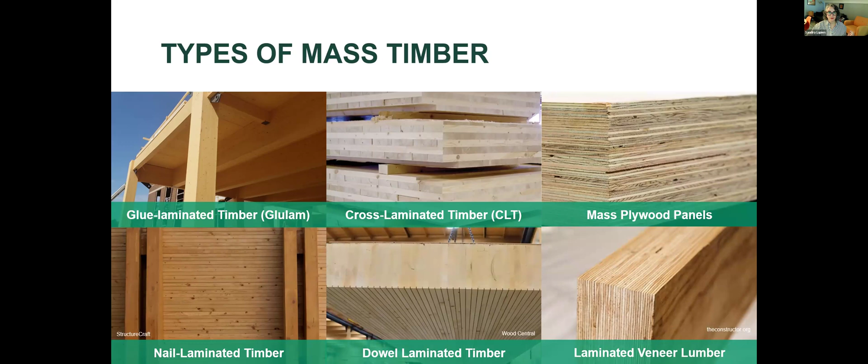A few things that Mass Timber at MSU is doing to foster a Mass Timber ecosystem in Michigan - first, I think George is going to talk more about this - we really leverage our STEM facility as a learning laboratory to create knowledge and community across the state.

We host a quarterly virtual MassTimber community of practice. It's an online space where people can come together to learn about MassTimber and to exchange information about MassTimber with others who are engaged or seeking to engage with MassTimber in Michigan.

This next meeting is actually next week, March 19th, and we're going to be talking about the MassTimber elements of the new 2021 Michigan Building Code. So if you're interested in that, follow up with me and we can get you some information.

We bring people together, we host events, we take people to events. We want to make sure that people have access to information and access to each other to build networks and partnerships. For example, later this month, we've organized a delegation of Michigan folks to attend the International MassTimber Conference in Portland, Oregon. Again, if you're interested, let me know.

And then research and teaching. We have a diverse research portfolio related to MassTimber across forestry, forest economics, chemical engineering, construction management, structural engineering, all different types of research, and then also work developing curriculum to educate students and professionals about how to build with MassTimber, how to design MassTimber, really working to increase the knowledge base to advance this new way of building.

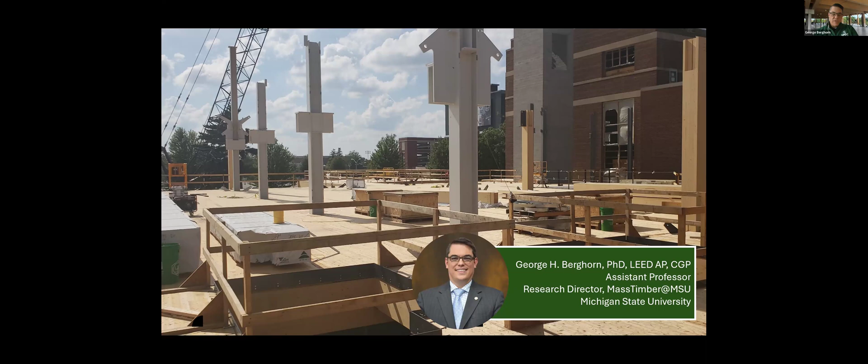So what I'm going to share with you this morning is just a little bit of the history of how the STEM building came to be at MSU, and then how we were able to effectively make the case for a first of its kind MassTimber structure on campus within the state back at the time that the planning process was being conducted, and now how the building continues to build that case for MassTimber construction statewide, regionally, and nationally. So every good project needs an origin story, and this is ours.

So in the summer of 2016, there were a group of individuals from Michigan who convened in Madison, Wisconsin at the U.S. Forest Service Forest Products Lab. These were primarily academic folks from universities across the state of Michigan that decided to get together just to better understand what kind of research support and capabilities were available from the Forest Products Lab.

Through those meetings and discussions, one of the things that the group really settled on was that in order to propel MassTimber interest forward in Michigan and really move it out from just a niche interest type of thing into broader adoption, we agreed that some university within the state should really take on the mantle of trying to get a MassTimber building constructed on campus. And that was for a variety of strategic reasons.

Obviously, with public universities in the room, these buildings would then become publicly accessible to others in the community, both professionals and also people within the community who might just be interested in mass timber. But also importantly, at least for MSU, U of M, and I believe Wayne State University, we have written into law that the boards of trustees of those universities are in effect the AHJs for building projects on campus.

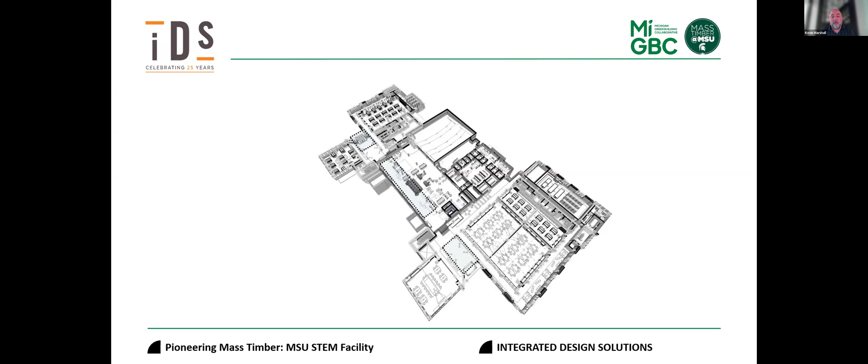The building is broken up into essentially three buildings, with the core being the Shaw Lane power plant, then the STEM wings, and then the classroom. The classroom addition is actually part of the power plant code-wise, but it's these three chunks that make up the building. The Shaw Lane power plant was a coal-fired power plant that was decommissioned in 1976 and sat waiting for its future use ever since.

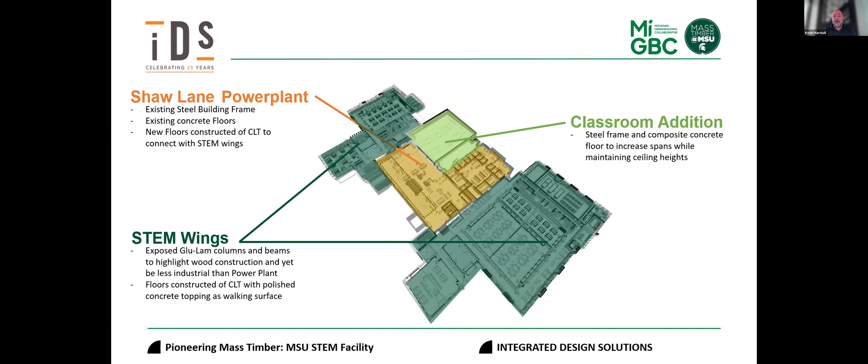When we added to the project, our site was chosen by the university in part to engage as a learning center with the power plant and create this whole facility, this complex of buildings. Later on, towards the end of the project, the classroom addition was added, such that we created a lecture hall and some large flat floor classroom on the upper floor that is serving a significant need on campus.

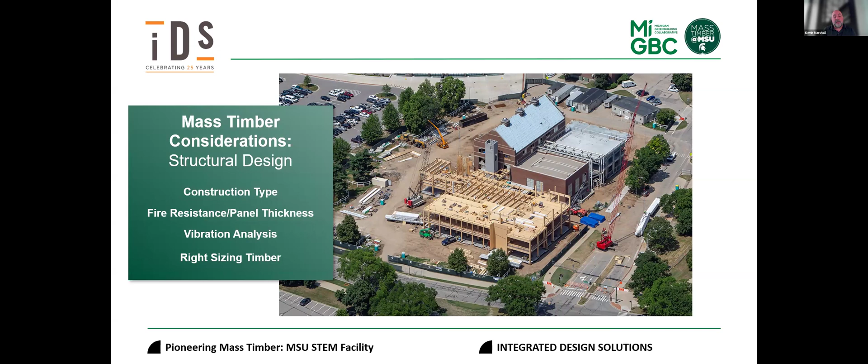So I'm going to talk a little bit about the lessons learned, and we'll start off with mass timber design considerations of structural design. There was construction type, fire resistance and panel thickness, vibration analysis, which George mentioned, and then right-sizing of the timber.

From a construction type standpoint, when we started this out, this was pre the 2021 IBC, and so types A, B, and C of a type 4 construction did not exist. So we were relegated as a business occupancy in a multi-story building to either being type 3A or B, or type heavy timber, or type 5B.

We worked with the State of Michigan, with the Bureau of Fire Services, and determined that the building best fit not a type 4 heavy timber, but actually type 3B, because of the need, from the laboratory's perspective, to have some concealed spaces within the building, which are generally not permitted in a heavy timber building.

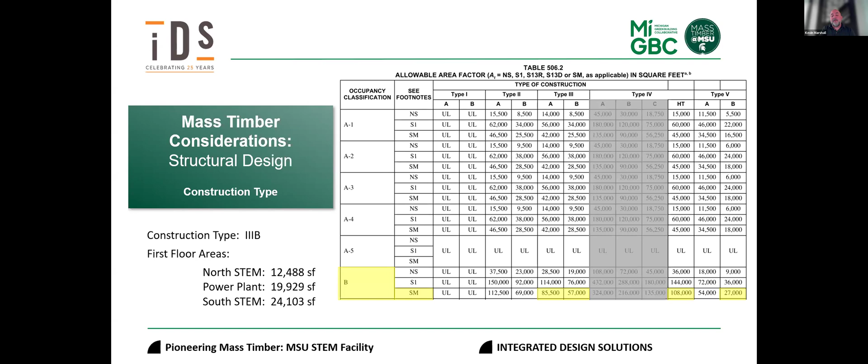Then we could have, as you can see on the lower left, the south STEM being the biggest chunk of the building at 24,000 square feet, could have technically fit within type 5B, but we wanted to leave some room, since we were going to build it at type 3 capacity anyway, to give the university some ability to either add on, renovate, or do things in the future with the project.

When we jump into fire resistance and panel thickness, the building has a Type 3B zero-hour fire rating for the structure, but there are still elements that need to carry fire rating, such as the stair shafts.

We used CLT panels to help stiffen the building and also carry some of the load of the stairs. Our structural load required 5 layers, a 5-lam CLT for the structural capacity. But when we calculated what we needed for the fire rating, it added 2 layers. So we ended up with, in the top center section, you can see the vertical joints, how they're handled from this panel with a 7-ply CLT wall system. The bottom shows a typical edge bearing on a CLT wall.

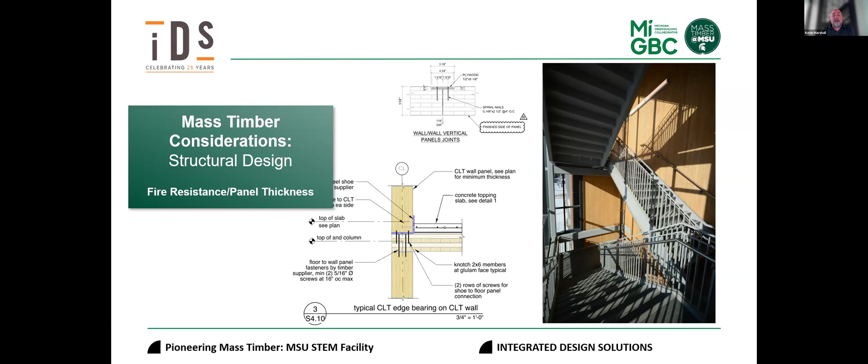This is how we first approached the project. But then we discovered that as part of the Michigan Building Code, you have to support the rated construction all the way down to grade, and to tie in our non-rated floor systems into the wall as shown on the screen would not have been possible. So we actually hung the CLT floor decks from the side of the panels, as opposed to embedding them in, as we see on this screen.

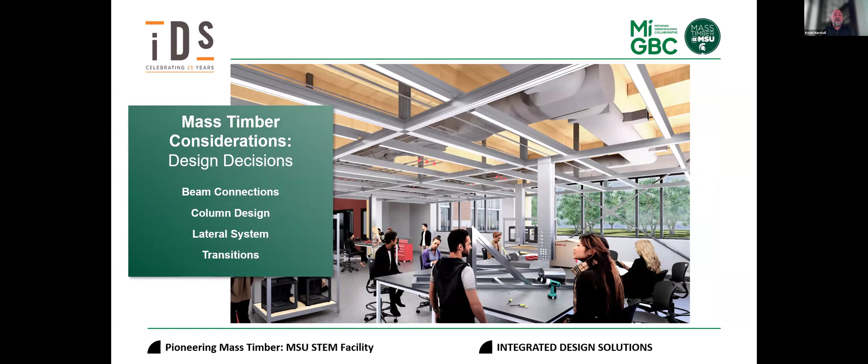Then we jump into design considerations. The first one we'll jump into is beam connections. There's a myriad of options. When you start the process of a mass timber building, there's a whole kit of parts that you can choose from in order to construct your building.

Part of that will be based on your construction type, and if you need to have protection of your connections for the primary structural frame system, in which case you would use the bottom center image, where you have to wrap them in gypsum board or some non-combustible surface.

The STEM project, because it was Type 3 and non-rated structure, we were able to expose the connection points, and that helped with tying in with the steel structure that was inside the power plant adjacent to it, to create some synergies between the two buildings. The other images just show some different methods for connecting, how different things can be assembled to make these connections.

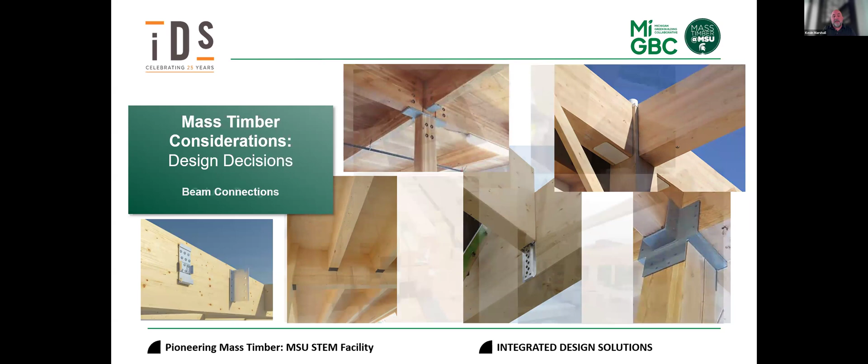Then there's the column design, where the columns started at grade, and the top left image shows a large base plate that extended down to the structural foundation, and then the floor was poured around it. You can see in that upper right picture there are 10 dowels that run through a knife plate, which you see in the top center picture, that tie the columns to these base plates.

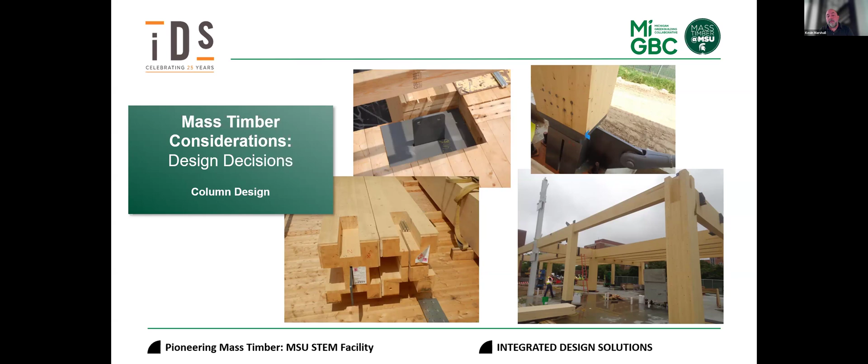One of the things we learned during the process is every manufacturer has kind of different ways they like to do connections, and it's one of the most important things we weren't able to go into fully, which was to select your mass timber provider early in the design process, so that you can right-size the timber structure to their typical modules and work with how they like to make connections.

All buildings have a lateral system that keeps the building rigid from wind and movement, and we had to make a decision on how we wanted that. We could have done timber, as you see in the University of Massachusetts Amherst building that we went and toured. They used glulam beams for their diagonal bracing.

The STEM project, we wanted to keep it lighter and a little thinner, and also bring more steel elements in to tie in with the power plant. So we used steel diagonal bars, as you see in the lower right, and then there are knife plates in the upper left that occur at all of these diagonal brace locations that tie the whole structure together.

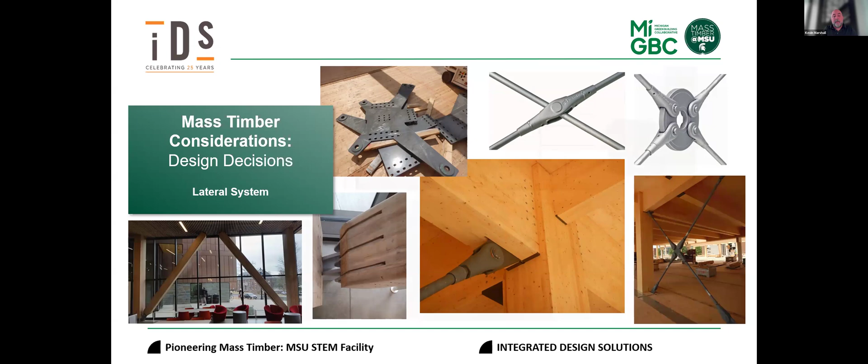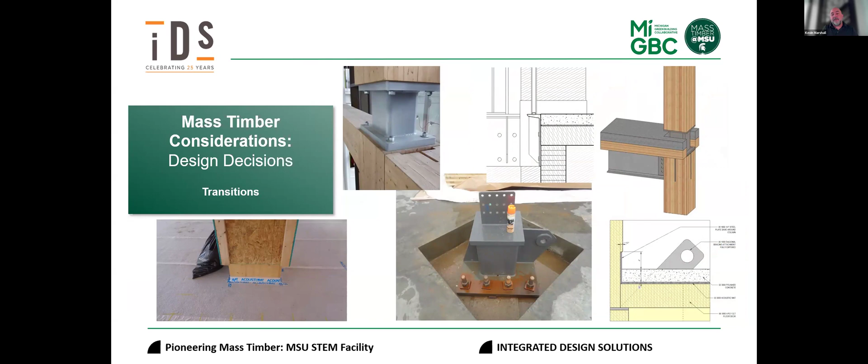Here are some more considerations on how the transitions happen, different options to consider for construction and making your transition as the columns stack as they work up the building.

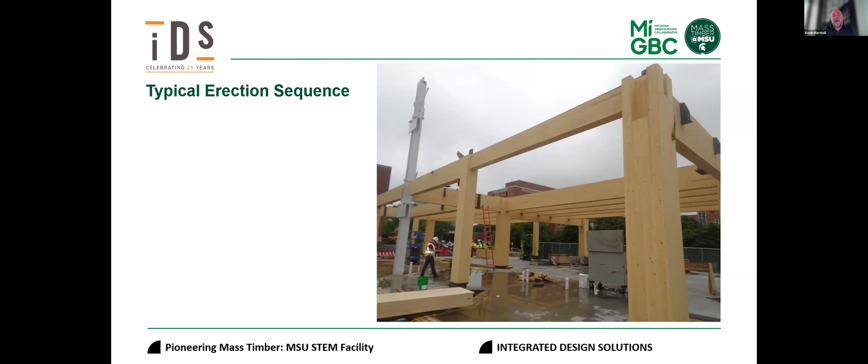You can see because of structural loading on the STEM project from the south, in the south penthouse, we inserted 4 steel columns within the wood frame, because otherwise the columns would have gotten so large if they had been timber that it would have affected program within the labs on the teaching floor. So we used, as George mentioned, a hybrid structure to create this.

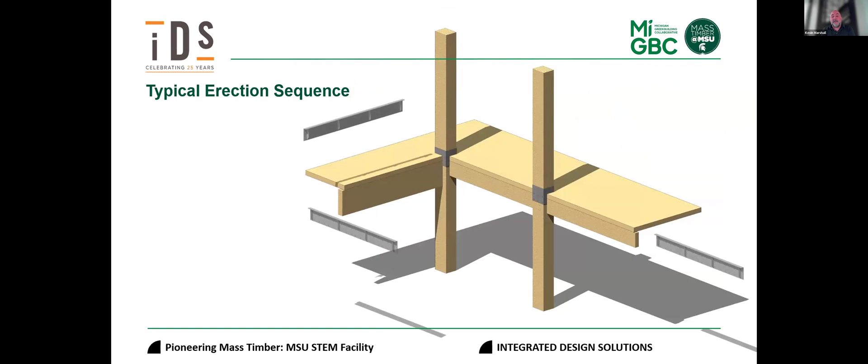Then we bring our CLT panels in, and then the next columns for the next floor. At this point, the floors are tied together and stable. Bill will talk as part of the schedule about the ability to work underneath that floor as it went up, which had some benefits. Then you finish it off with decorative pieces, the edges of slabs - in our case, a 3-inch concrete topping - and the railing system for our 3-story opening at North Stem and South Stem.

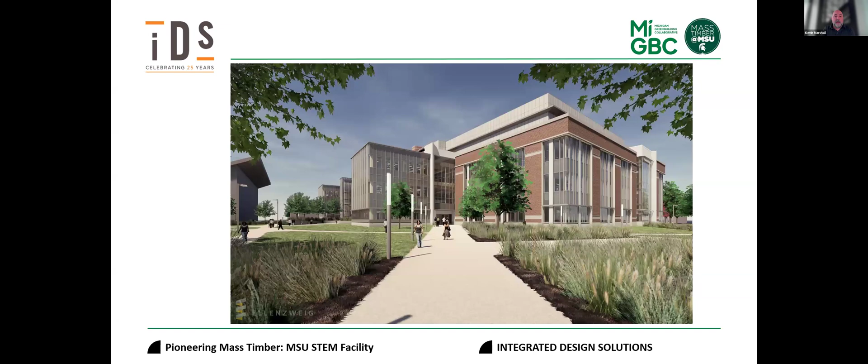Now I'm just going to jump through a few pictures of the completed project to whet your appetite. And I think I hit my target almost. It's a beautiful building.

Wonderful. Thank you so much, Kevin. Wonderful to hear a bit about the design, what went into it, the considerations, and a little bit about the strategy for putting the building together.

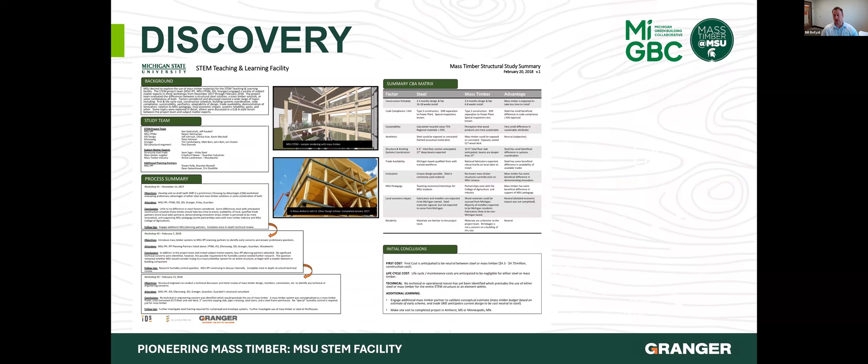In the end, our conclusion was there was no reason why we couldn't do mass timber. The team was excited, and to cap that off, we wanted to go see an existing mass timber project. So we took a field trip out to UMass Amherst, and from that, everybody was energized and ready to hit the ground running to do all things mass timber.

So with that, as Kevin and George kind of talked through, everybody got through that programming phase. I look at a project in 4 big buckets. We got through that programming phase, and we're kind of leading into that schematic design. As you saw, Kevin, with the layout there, we started to understand what that base sizing looks like and what the spatial relationships are between the different departments of the project.

As we got there and started to understand what the bones of the structure was going to look like, we knew after doing a bunch of outreach that this was the right time to bring on a mass timber partner. As Kevin mentioned, it's not a typical commodity like steel or even concrete structure. These are somewhat customized based on the manufacturer you choose to work with, from a timber manufacturing process and even through a connection design process. So bringing those partners on board early was a large part of the success of this project. I think that goes for any project - the sooner you can bring your team on early and help influence the design and provide that level of collaboration, your project's going to be successful.

From that point forward, we used their insights and expertise - Nordic in our instance, which was interesting enough, since the project we went to look at, UMass Amherst, was actually a Nordic product itself. But understanding how to right size - Kevin mentioned the right sizing of the timber - we made that transition early and aligned that with the architectural elements of the building. So we were able to move forward hand in hand with our supplier to provide a product that was cost effective and maximized the overall project.

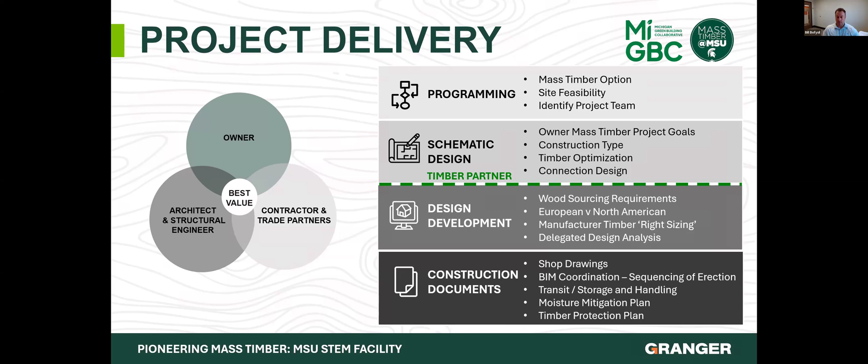To pull on that a little bit farther - when you get to steel, it's pretty easy. You work with a steel subcontractor and everybody just starts doing their calculations, and the building's kind of already been designed - you just got to follow the calcs and some shop drawings. Whereas mass timber, it's a little bit different. You want to early on board your partners, but it's not just local sourcing at this point. Hopefully in the near future we can get a little better and have more local resources.

I think that's part of the end goal, but just as an idea of what this map looks like and what your sourcing options are - this is a national search or even an international search. So understanding who you can talk to and what products they provide is going to be an important part early on when you're starting to develop your project. Some people are vertically integrated and can do everything, and some people only supply one piece of the puzzle. So understanding how you can source this is a critical part of your success on a job.

Mentioned early on - you've got to have that collaboration. This isn't just a design bid build process with mass timber. You need that influence early on from your suppliers so you can take advantage of efficiency of your frame, your connection designs. You're really doing all these things up front to be a good steward of the owner's money. Also the indirect benefit of that is the early coordination - you get to bring on your MEP and potentially your facade folks, depending on how vertical you're going. If you're over six stories, you get into that BIM collaboration process early on, and you can prefabricate your vertical openings or any openings that you have within the mass timber.

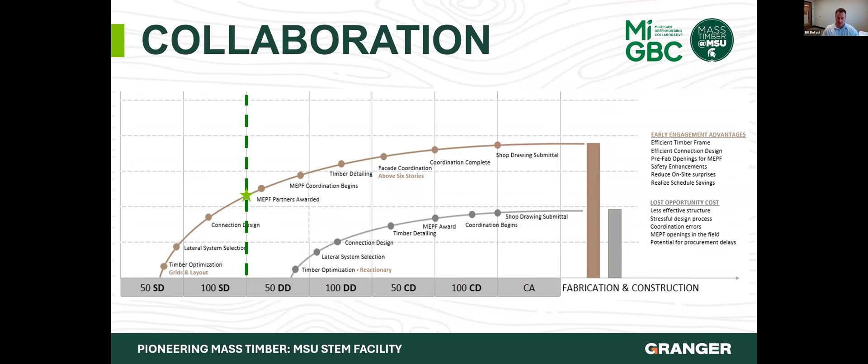So again, you're being more efficient with your pre-manufactured timber. Once you do the install in the field, you can have that handoff faster with your interfacing trade partners. So any overhead mechanical or electrical rough-in can go in earlier than with a typical steel and concrete slab building. This system for mass timber plumbs and racks itself as you go up, allowing that compression and schedule if you take advantage of those front-end loaded tasks early on within the project.

To that point, the front end of working with mass timber is a longer pre-construction process. You need to approve the geometry, get through some of the connection design, and then allow them to start milling the rough pieces and get the CNC programming initiated. So an indirect part of onboarding a mass timber partner early on is dealing with this heavy front-loaded pre-construction process and collaboration, but you're also trying to predict and manage your production slot for fabrication on the back end. There's a lot going on there.

Other challenges, as you become more familiar with mass timber—I don't know if these become challenges, they're just part of the process—it's a non-traditional procurement, so just being aware of that, your search is more national, could be international.

The tolerances, if you're working around existing buildings, are a lot different than steel. The tolerances we have with this project, and I'd say probably common for most—Andrew can talk to that a bit—we're at 1/16 of an inch with our tolerances. So being adjacent to an existing building was critical, understanding what the tolerances would be, and then also understanding how to protect your finishes while constructing and during the life of the project before turnover is an important element of the job.

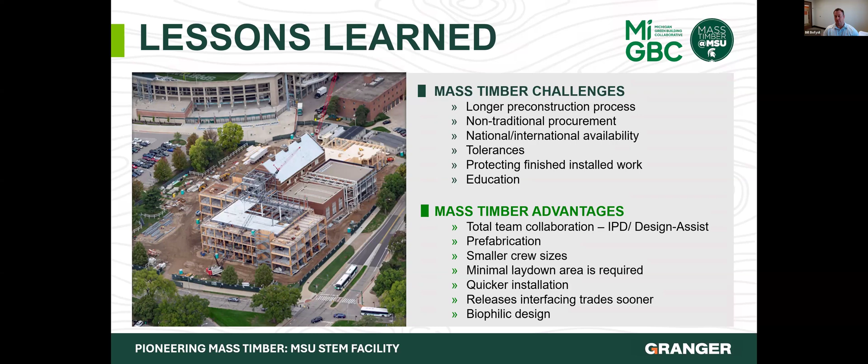And then obviously the beauty of the timber is a huge advantage. Having that level of exposure, I think, was awesome for this project, as Kevin mentioned. It really was able to show off the natural beauty of the timber and all the utilities that go into play with these lab buildings here. So I think that's all I have at this moment.

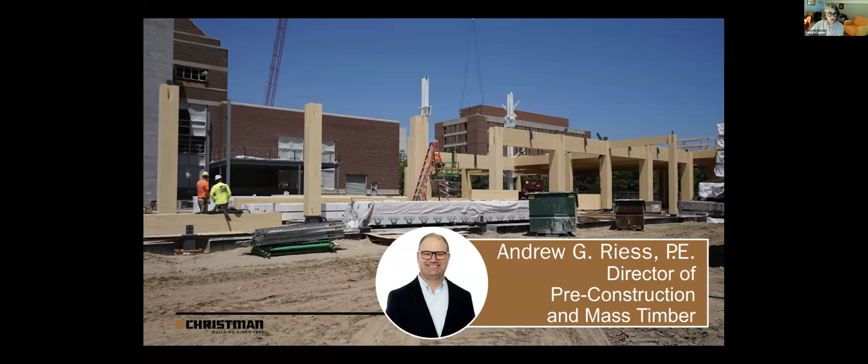This project here was Christman's first project in mass timber. Management back in 2017 saw that mass timber was a new product coming along that was replacing construction like you see on the screen, replacing concrete structures. Christman has been big in the concrete industry for many years, and it was kind of a threat to have something new coming in and replacing something that we do.

So management made the decision to investigate mass timber and see if there was something that fit our company. We started investigating mass timber, attended the Mass Timber Conference in Portland, started reading articles, started looking into it. So when the MSU job came down, Bill and his team asked us to quote it. We were very interested, one, because it was something new for our business. It's a local job, and Christman has been working at Michigan State for 110 years, so it's a very important job for us.

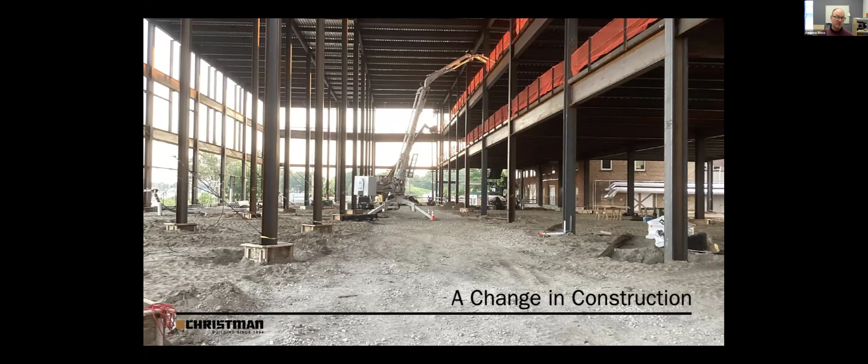One of the major questions we had to ask is how is this done? We've got a lot of professionals here with a lot of experience, but we're working with something new. New product, goes together like steel, but it has its different challenges and its different connections. Like it was mentioned before, there's lots of different ways these connect, and they vary from manufacturers. So trying to learn all this interesting and different ways of doing things was a challenge.

So we got together and we figured out what questions we need to ask. How does this go together? How does it need to be handled? It is a finished product. What crews are we going to need? How many guys, what kind of experience do they need to help transfer into this type of construction? What tools are going to be needed? There's lots of long screws that have to be driven in. Everyone's really amazed when you show them some of these two-foot long screws that are used to construct these.

Another item is, what are the safety requirements? We're vertical. We have a history of doing vertical construction here at Christman, so we had some ideas, but how were we going to move around the site? How were we going to keep our guys safe? How were we going to shore the building so it's safe?

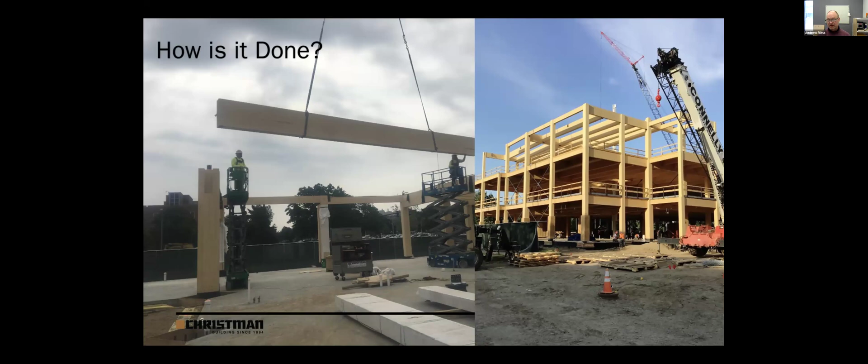During the project, planning was probably one of the most important things, working with Granger and Nordic, who had all the experience doing these types of buildings. We planned the project like normal, scheduled deliveries, site logistics, but then we started adapting to work with the mass timber. You can see here, everything is on the ground, it's wrapped. You got to keep it clean, you got to not damage it by sitting on the ground or somebody running into it. So that was one of the things we had to learn, teach the guys, and be nice with the material.

As Bill explained earlier, all deliveries were coming from Quebec on this project from Nordic. That is a two-day drive. It's not like a steel fabricator, if something's wrong you go 15 miles away and get it taken care of. Nordic did a great job bringing everything out organized, so we could erect it in order. But during this planning, we just adapted all of our skills and converted them over to mass timber to develop our program here. Also in the project planning, there were items we had normally never done, like the base plates. That was something we had to learn. Putting up the bracing that was used on this project, which was heavy and very expensive.

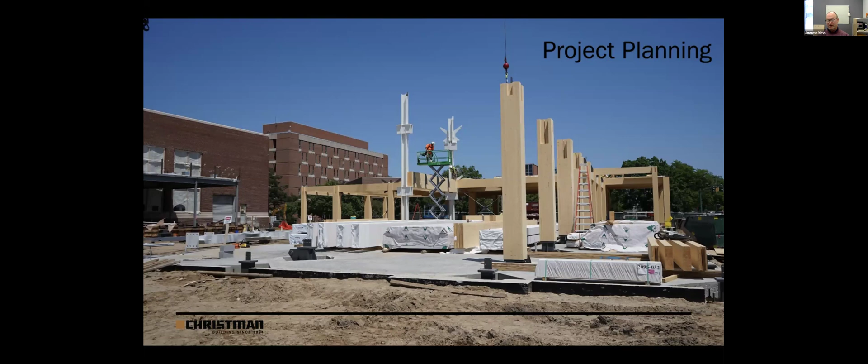And then just dealing with the existing building, we had the two wings on this, the north and the south, but what we also had was some CLT floor inside of the building on structural steel. So some unique challenges there, trying to get those panels inside with the visual side down without damaging and scraping them. The hybrid structure, working with getting some steel in, that was something a little new for us, and some unique challenges there.

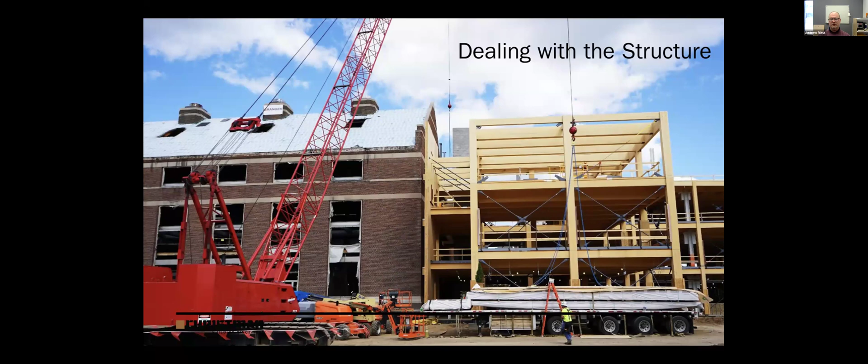Like I said, the bracing and erecting pieces inside was a definite challenge. And then the tolerances, as Bill spoke to, that has probably been one of our greatest lessons learned. Attaching mass timber to concrete, attaching it to masonry, everything's different, and the mass timber is very precise. That's where a lot of our challenges came up on this project and projects after. So that was probably the greatest lesson learned there.